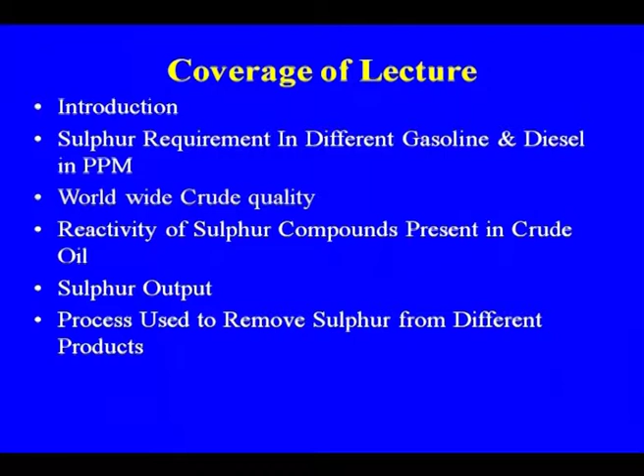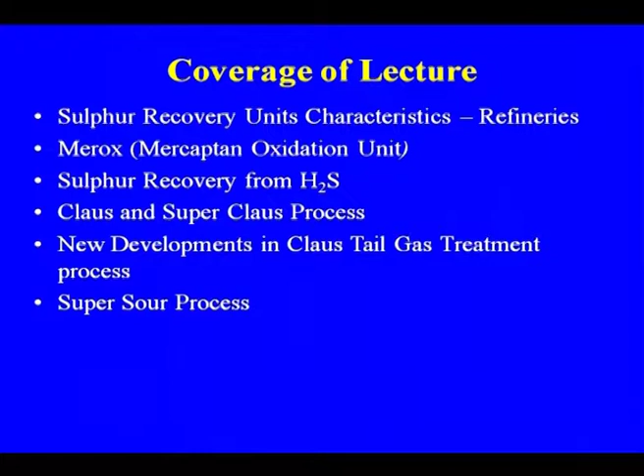Sulphur recovery units' characteristics, the Merox process, Merox sulphur recovery from H2S - there has been continuous development in sulphur recovery processes, because the conventional Claus process still had some emission of sulphur compounds, so how to minimize that emission. The super Claus process and other new developments have taken place, because the Claus tail gas was also containing sulphur, so how to treat that Claus tail gas - we will discuss the Claus tail gas treatment process.

Some other developments that have taken place include the Super Sour process, developed by Indian Oil Corporation, which is the indigenous technology that we have.

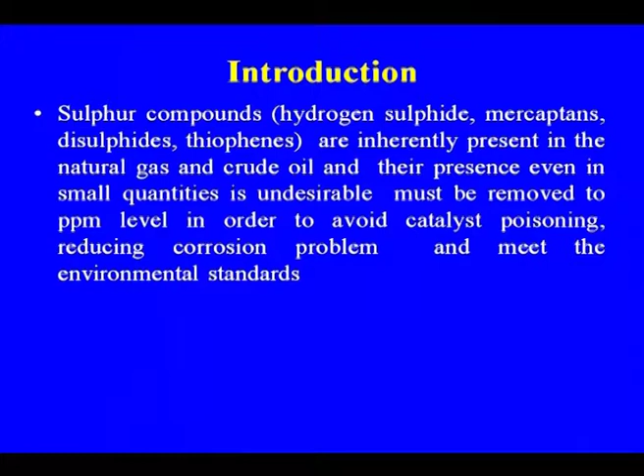Introduction about why we need this desulfurization process or sulphur recovery, and why it has become important. Sulphur compounds - hydrogen sulphide, mercaptan, disulphide, thiophenes - are inherently present in natural gas and crude oil, and their presence even in small quantity is undesirable, must be removed to ppm level in order to avoid catalyst poisoning, reduce corrosion problems, and meet environmental standards, because the corrosion problem is also one of the severe problems because of the coming of high TAN crude oil and high sulphur crude oil.

As I told you, the level of sulphur has been increasing. The level of sulphur in the past two decades has steadily increased due to the use of more and more heavier crude, and cheaper high sulphur crude, which has forced the refining industry to go for additional facilities like ultra desulfurization for gasoline and diesel to meet the requirement of stringent sulphur emission standards.

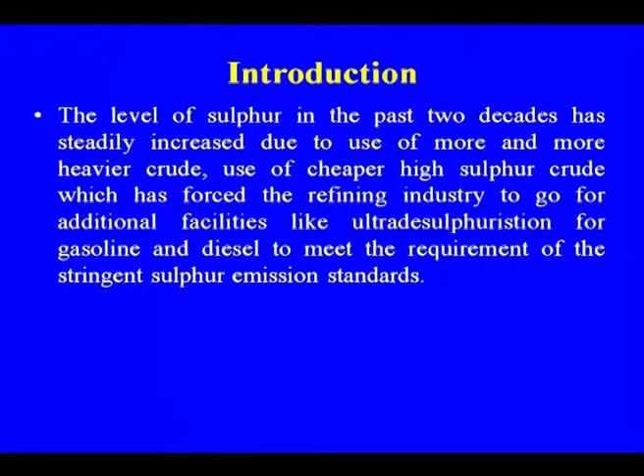Whatever products you are getting, whether diesel, kerosene, or gasoline, must be desulfurized before it goes for end use. So these are some of the driving forces which have led to the development of the various sulphur recovery processes or desulfurization processes.

Sulphur is one of the major impurities in heavy crude, resulting in higher concentration of sulphur compounds in the undesulfurized product stream. This product stream is not just the final product, but also the feedstock to various processes like FCC, hydrocracking, and catalytic reforming. As already discussed, before going to the main reactor, the feed is pre-treated, and even after that, the product contains traces of sulphur compounds.

To meet environmental standards of 50 ppm, the product has to be treated. Sulphur content in crude varies widely depending on origin, varying from one place to another, one well to another, and one region to another. So there is wide variation found in crude oil quality with respect to sulphur, and this variation is considerable, impacting the process scheme as well as the product slate.

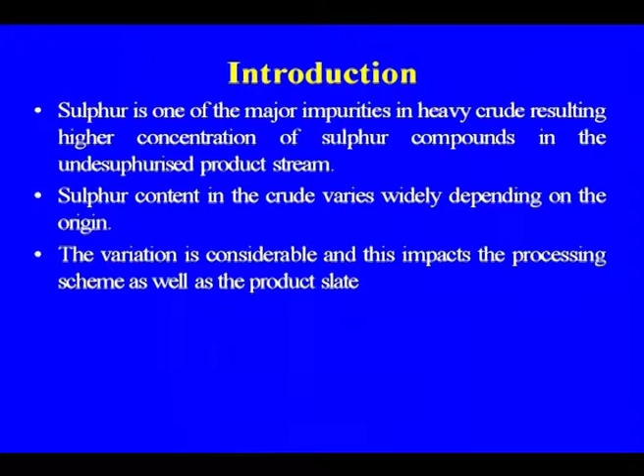Due to increasing environmental concern, stringent limits on sulphur levels in fuel are being implemented. There has been continuous reduction in SO2 emission as per Euro norms - Euro 1, Euro 2, Euro 3, and Euro 4 - and now to achieve 50 ppm is a big challenge for refineries through desulfurization. So ultra desulfurization, deep desulfurization, hydro desulfurization is required, which is an additional capital cost, an energy intensive step, and sometimes results in loss of hydrocarbon.

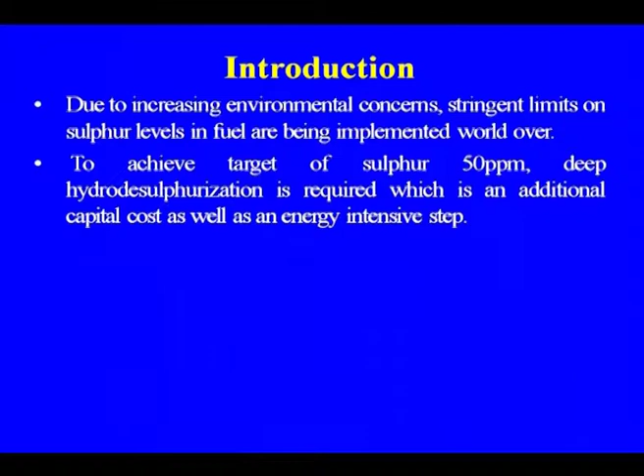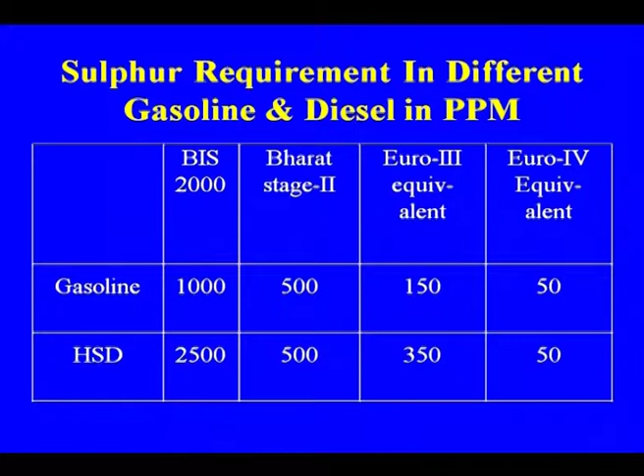This is why we are going for the desulfurization process. If you see these figures from 2000 to the changes taking place - the BIS standard was earlier 1000, Bharat 2 it was 500, Euro 2 and Euro 3 150, Euro 4 is 50. So that is the level of SO2 that has to be maintained in gasoline or diesel. There is a lot of change in the standards also.

So this is one of the reasons why we are going for recovery of sulphur, and at the same time sulphur is also a very important feedstock for various chemical plants. The only problem is that the generation of sulphur is not so huge as required, whether for sulphuric acid or other plants.

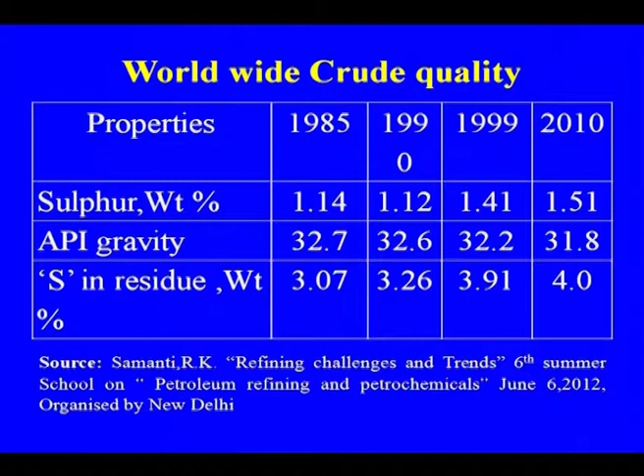This is the worldwide crude quality, how it is changing, and from 1985 to 2010, the sulphur content in crude oil varied from lighter to heavier sulphur in the residue, which is also increasing. So these are some of the problems which necessitate desulfurization of the product and desulfurization of the feedstock to various processes.

During this process, from the various streams we are getting sulphur, because one of the major sources of sulphur in the refinery is the FCC. If you see the FCC, the feedstock going to it is pre-treated. So one of the major sources of sulphur is the FCC.

This is the sulphur content of various crudes, indigenous and other crude. Here it is Bombay High 0.1, Bonny 0.1, Arab Heavy crude 2.87. So you can see the wide variation in sulphur content across crudes.

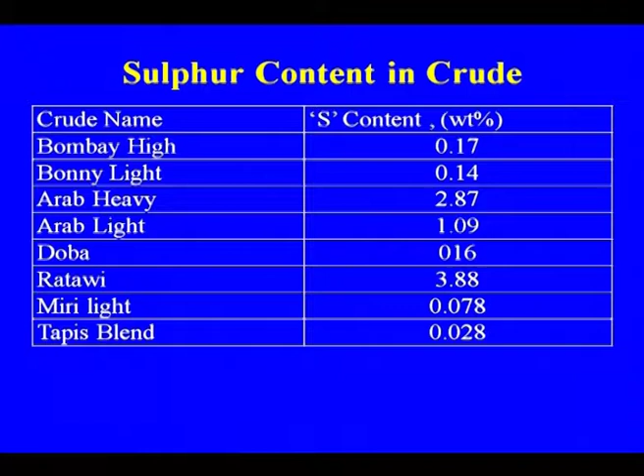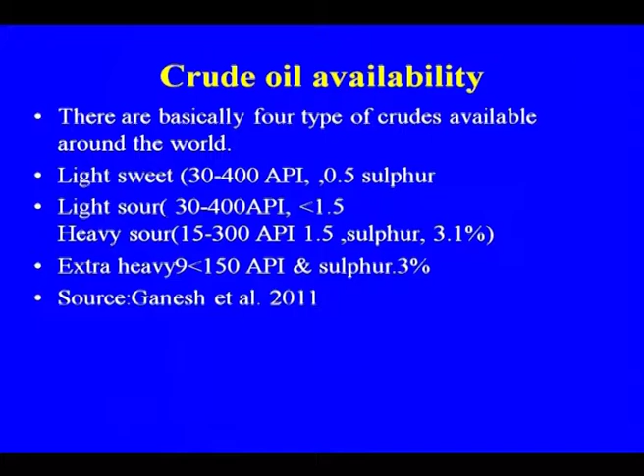There are basically 4 types of crudes available around the world, as already discussed - light sweet, light sour, heavy sour, and extra heavy sulphur. So this is how sulphur content varies, and API gravity also varies. In case of light it is 30 to 40, light sour is 30, but in case of heavy sour it is a much heavier feedstock.

This is how changes are taking place in crude oil availability in the future. It is expected that more and more heavier crude oil will be available, and you will have to adjust your processing scheme in the refinery accordingly to meet environmental standards, because now you will have to supply fuel of Euro 4 norms even in India. Some refineries are already ready to supply fuel of Euro 4 norm. So definitely these are some of the changes taking place in refinery processes because of the coming of heavier crude or high sulphur crude.

These are the reactivity of the sulphur compounds, relative reaction rate, boiling point of the various components, which creates a lot of problems. Depending upon that, the removal of mercaptan and dimethyl sulfide is easier than thiophene or benzothiophene.

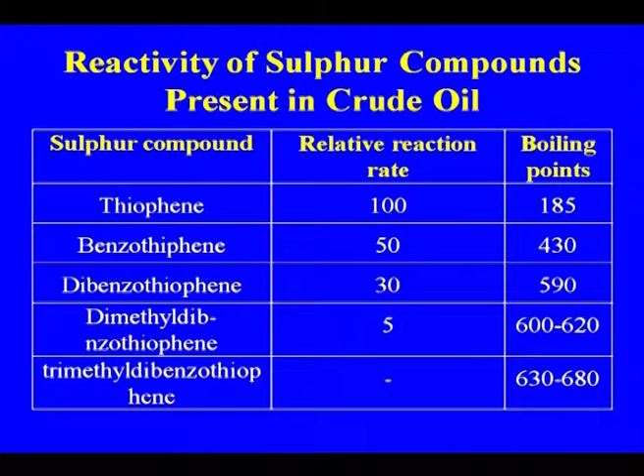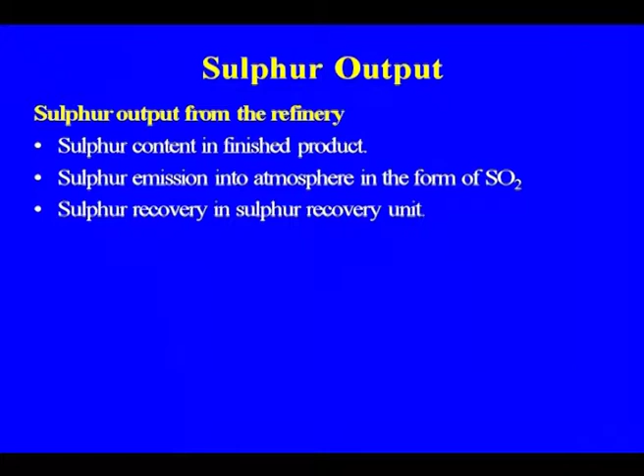Now let us discuss the sources from where sulphur is coming in the stream: sulphur contained in the finished product, sulphur emission into the atmosphere as SO2, and sulphur recovery in the sulphur recovery unit. Earlier, the Claus process or modified process achieved up to 97% recovery, so some sulphur compound still remains. Because of that, development continues in the sulphur recovery unit to achieve maximum removal of the sulphur compound.

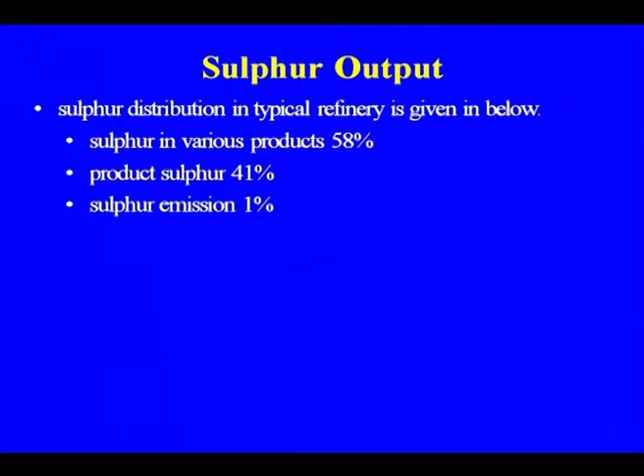Sulphur distribution in a typical refinery: sulphur in the various products 58%, product sulphur 41%, sulphur emission 1%. So you see the major contributors are the products from various refinery operations.

These are some of the sources which need removal of sulphur, and we do desulphurization for removing it. In the LPG treating unit we remove sulphur from the gases, which then go for further processing for removal from the gas stream, and finally go to recovery of sulphur by Claus, modified Claus, or other modifications.

In the gasoline hydrotreating unit, this is again the hydrodesulphurization process. Aviation turbine fuel uses the Merox process and hydrotreating. Diesel hydrotreating process also involves hydrodesulphurization, where sulphur lands up in the fuel gas as H2S during the hydrotreating process.

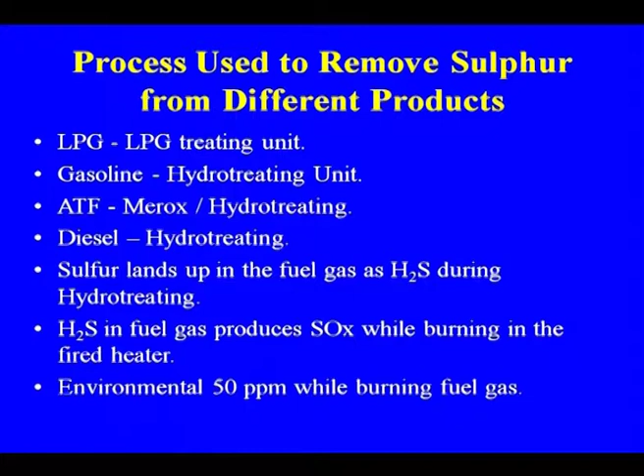H2S in the fuel gas produces SOx while burning in the fired heater. The environmental standard is 50 ppm while burning the fuel gas.

Hydrotreatment process: hydrotreatment of various streams from the refinery and petrochemical industry has become an integral part in order to meet feed standards of various processes, avoid catalyst poisoning, improve the quality of products, and meet environmental standards.

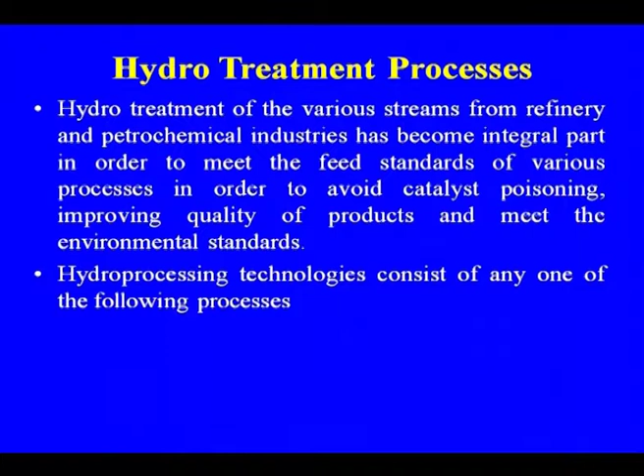Hydroprocessing technology consists of any one of various processes we use, which may be pre-treatment, hydrocracking processes, or hydrotreatment of fuels and lubricants. These are some of the hydrotreatment processes.

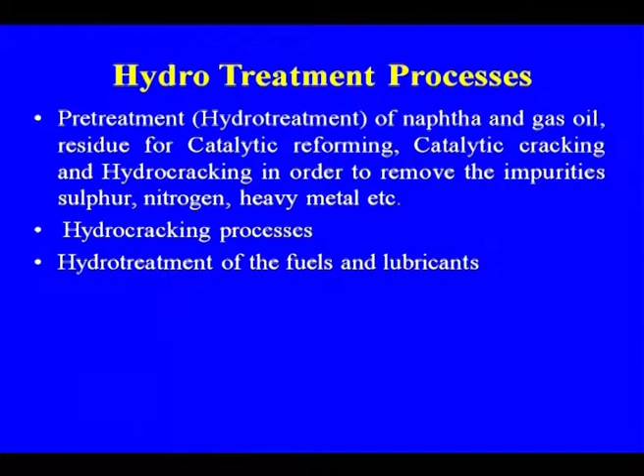Pre-treatment involves hydrotreatment of naphtha and gas oil, and residue for catalytic reforming, catalytic cracking, and hydrocracking, in order to remove impurities like sulphur, nitrogen, heavy metal, etc. There are also hydrocracking processes and hydrotreatment of fuels and lubricants.

This shows the major sources of sulphur and the recovery process in the refinery: the crude oil distillation unit, FCC or residue fluid catalytic cracking gases, LPG, hydrocracker, hydrotreating gases, coker, fine gases, and LPG.

These are some of the sources which normally go through amine absorption and then amine regeneration for the gases. After final removal, the gases go to sulphur recovery where we get sulphur. Even the tail gases go for further removal, and finally it goes to incineration.

Definitely another source in the refinery, because of processing sour crude, is the sour water from various streams. The gases from the sour water are removed by stripping, and then again it goes to the sulphur recovery plant.

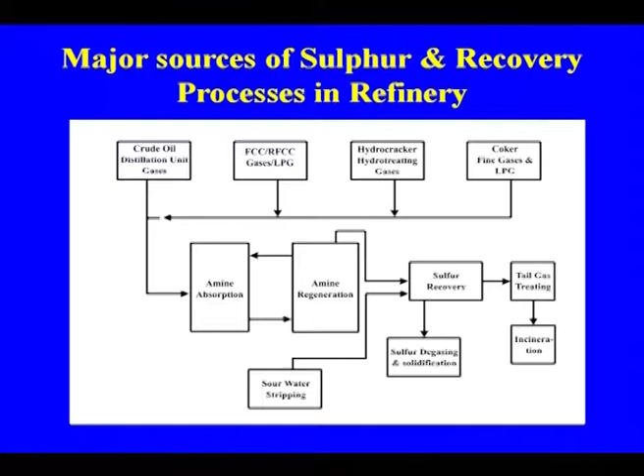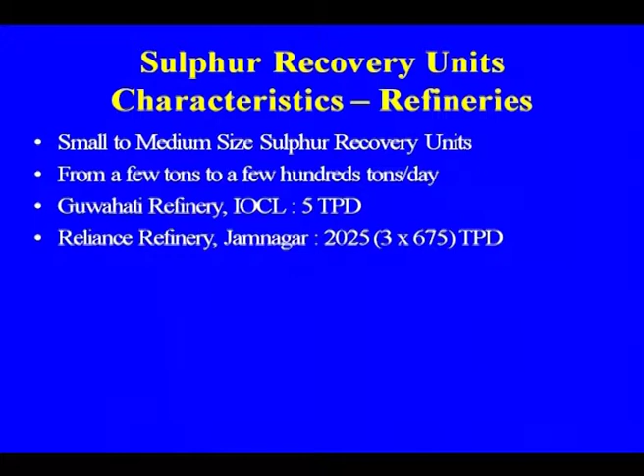This is actually the same process we discussed. Sulphur recovery unit characteristics: small to medium sized sulphur recovery units, from a few tons to a few hundred tons per day, Guwahati Refinery, because the sulphur content is low, so sulphur production is less. But in case of Reliance Jamnagar, where they process heavier feedstock, the production of sulphur is high.

Sulphur recovery units: feed composition varies linked to the refinery operating mode and crude feedstock. High flexibility is required, with multiple trains. Acid gas is always rich, with high H2S content. Ammonia from the sour water stripper is always present, sometimes in relatively high quantity.

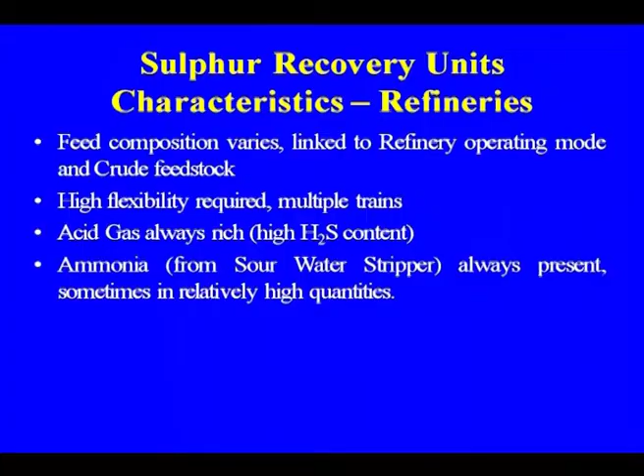This ammonia comes from the crude distillation column, or even from the FCC, to get rid of the corrosion problem. So these were some of the sources we discussed about where the sour gases or sulphur gases actually come from, and now let us discuss about the sulphur recovery unit.

The sulphur recovery unit consists of recovery of sulphur from H2S present in acid gas from the amine treating regeneration unit, and H2S from the sour water stripping section - there are two sources. One, all the gases going to the amine absorption, and after regeneration of the amine, the gas stream goes for treatment. The other source of sour gas H2S may be from the water stripper section, from the sour water.

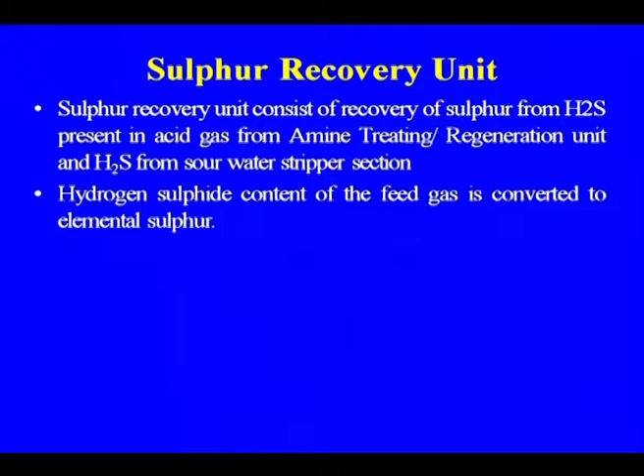Hydrogen sulphide content of the feed gas is converted to elemental sulphur, because this is how we can get rid of the sulphur compound. Amine absorption and regeneration is the process I told you about: first the absorption of H2S bearing stream, then regeneration of amine. The H2S rich stream from amine regeneration is sent to the sulphur recovery unit for recovery of sulphur from the gas.

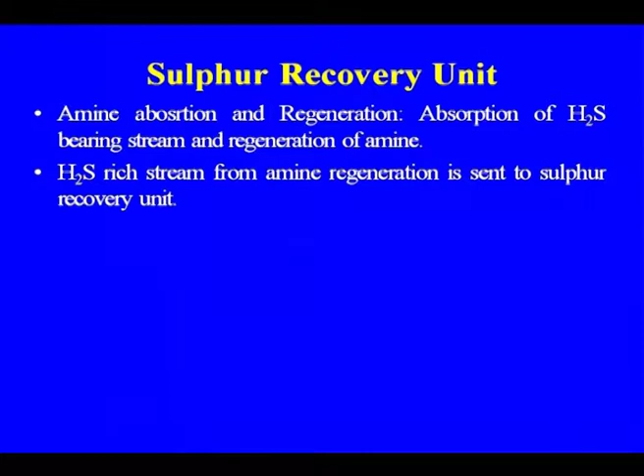Now let us discuss the Merox process, an integral part of the refinery - every refinery has a Merox process. The Merox process is used in the refinery for controlling mercaptan sulphur in gases, LPG, naphtha, and other petroleum fractions. The process is used for chemical treatment of LPG, gasoline, and distillate from the FCC or hydrocracker unit, whether once through or two stage, to remove the mercaptans.

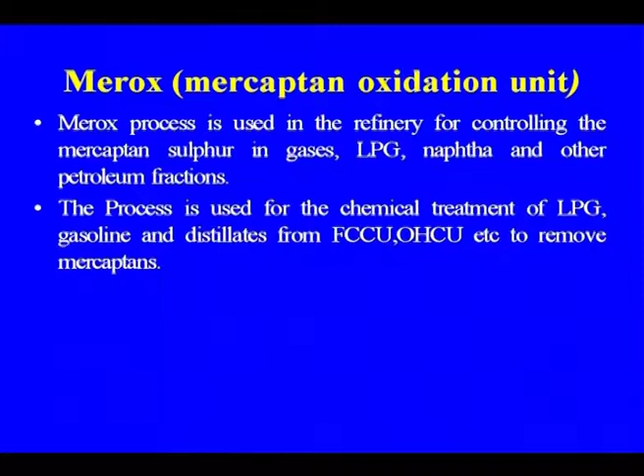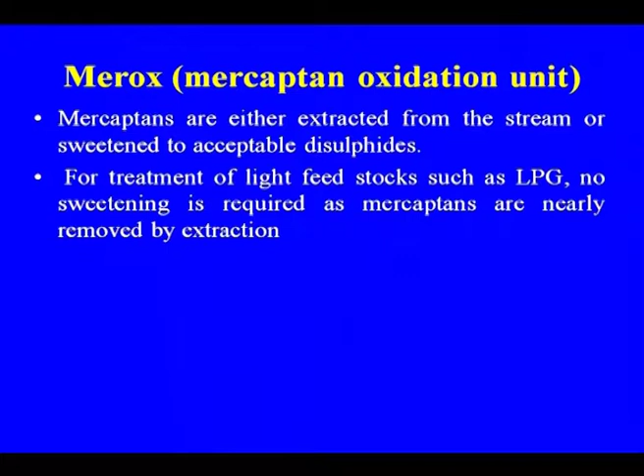Mercaptans are either extracted from the stream or sweetened to acceptable disulfide, since the disulfide smell is not present, but both mercaptans and disulfide have to be removed. For treatment of light feedstock such as LPG, no sweetening is required, as mercaptans are nearly removed by extraction. So these are the two types of methods, extraction and sweetening, to remove mercaptan from the gas stream.

However, feed containing higher molecular weight mercaptans may require a combination of Merox extraction and sweetening using a catalyst, because in the sweetening process we use a catalyst. The catalyst promotes the oxidation of mercaptans to disulfide using air as the source of oxygen.

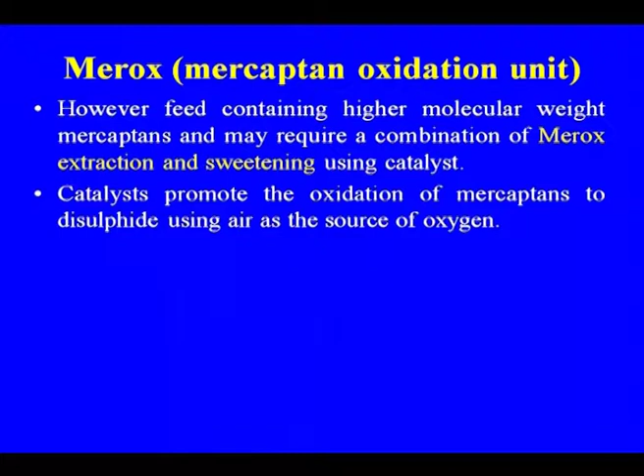Merox treatment can generally be used in the following ways: to improve lead susceptibility of light gasoline, though that problem is not there anymore since lead has been phased out; to improve the response of gasoline stock to oxidation inhibitors added to prevent gum formation during storage; and to improve odor in all the stock gases.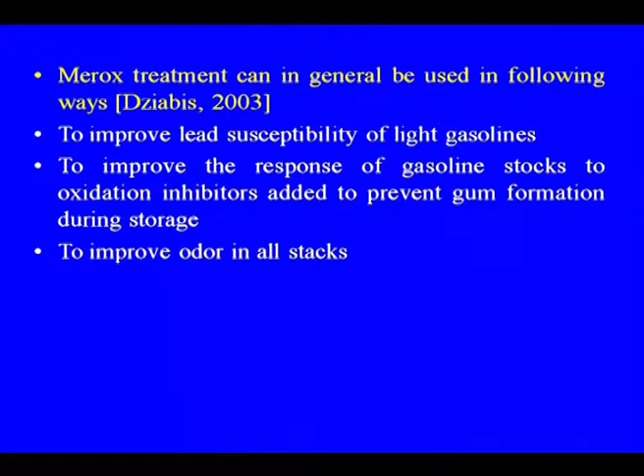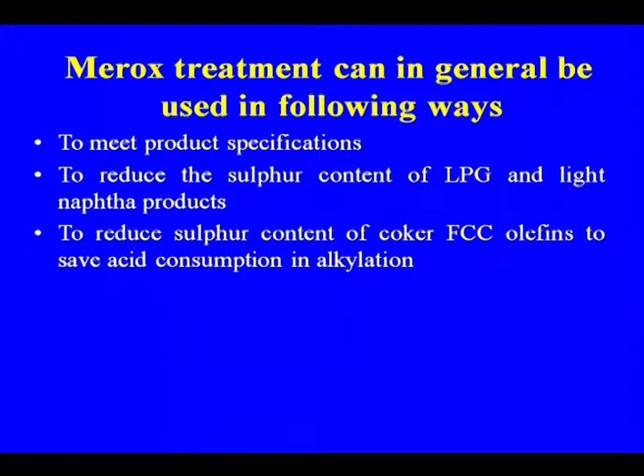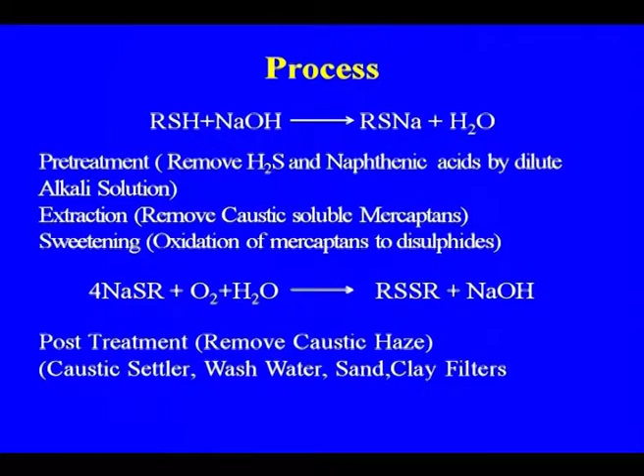Sulphur recovery from H2S: whatever H2S we get, the conversion of H2S or mercaptan to sulphur is very important.

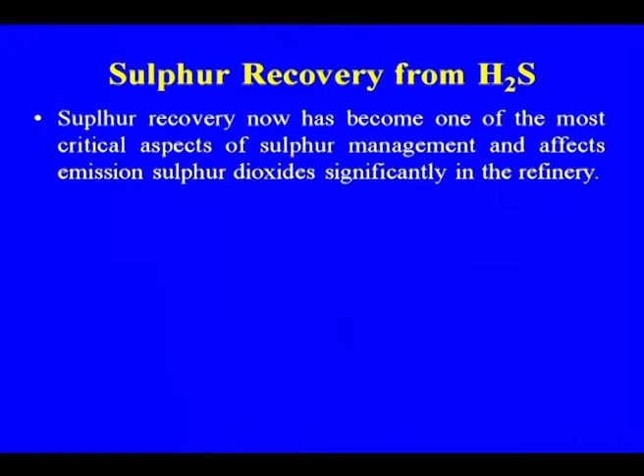Sulphur recovery has now become one of the most critical aspects of sulphur management and significantly affects sulphur dioxide emissions in the refinery, because if not properly removed, SO2 emission will occur. It's not only a requirement for the fuel, but also a requirement for refinery stack gas emissions to have lower sulphur dioxide. Their standards for emission of SO2 or particulate matter from the FCC, one of the main sources, are available in the standards given by the Central Pollution Control Board.

Now, let us discuss sulphur recovery in more detail. There are two sulphur recovery processes: the conventional Claus process used earlier, and the super Claus process. In the Claus process, removal of sulphur compounds was less and recovery was less, so the tail gases contained a lot of sulphur compounds. To minimize that emission, the conventional Claus process has been modified.

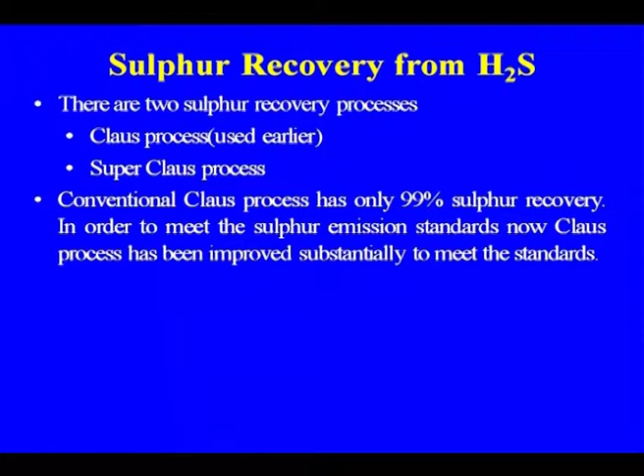The conventional Claus process has only 97 to 99% sulphur recovery. In order to meet the sulphur emission standards, the Claus process has been improved substantially. New processes are characterized by new catalysts, COS and carbon disulfide hydrolysis, increased recovery, and direct conversion of H2S to sulphur by oxidation, which is what we do in the super Claus process.

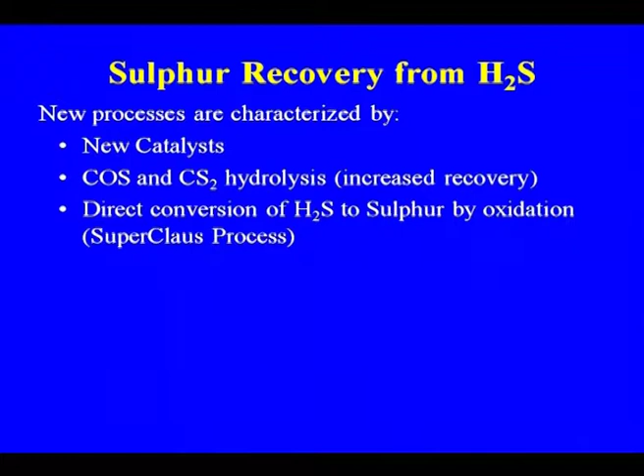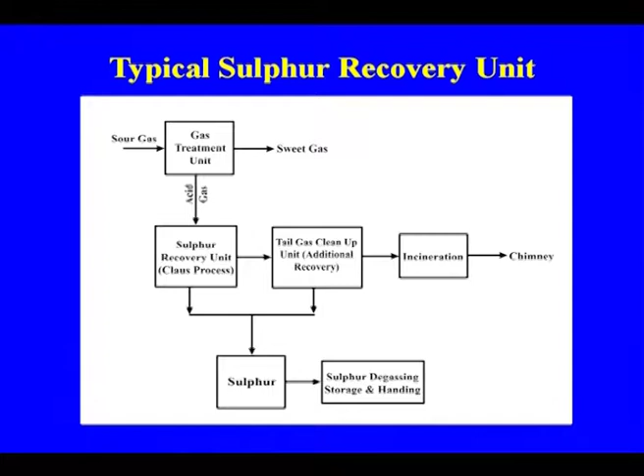This is the typical sulphur recovery unit. The sour gas goes to the gas treating unit, producing sweet gases, then acid gases go to the recovery unit, the Claus process. The tail gases from the Claus process go to further treatment: the tail gas cleanup unit for additional recovery. Finally you get sulphur, and the gases go up for incineration and then to the chimney. This additional modification came with stringent standards, so the sulphur recovery tail gas is treated, and finally the sulphur compounds can be used in various processes.

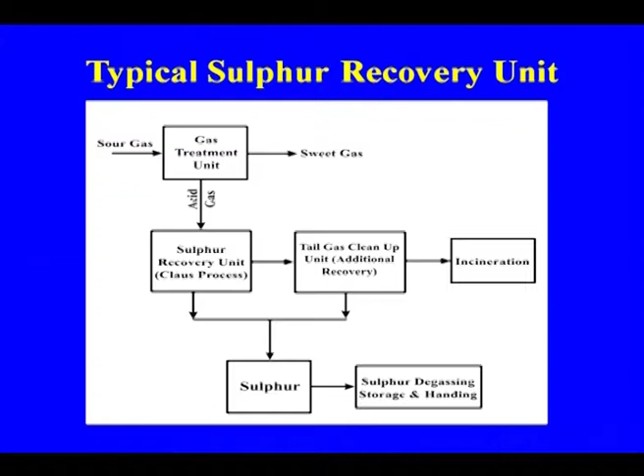Let us now discuss the Claus process in more detail. Claus process is a vapor phase oxidation process using alumina catalyst. In the Claus process, H2S is burned to form SO2, which reacts with H2S to form elemental sulphur. Sulphur is formed in vapor phase in the combustion chamber. The sulphur vapors are condensed and drained to the sulphur pit in the waste heat boiler, thus generating steam. In the Claus process, recovery is around 95 to 97%.

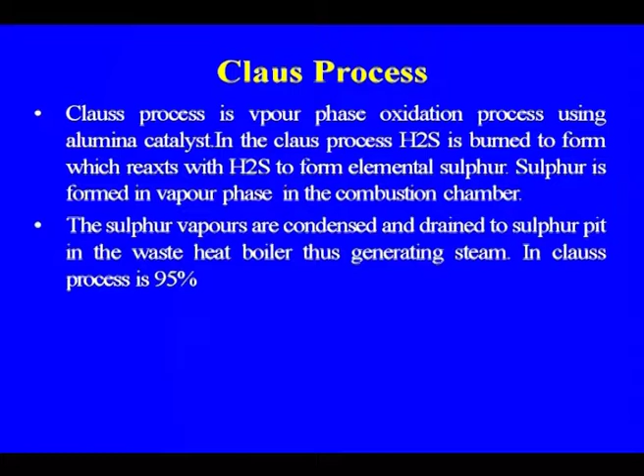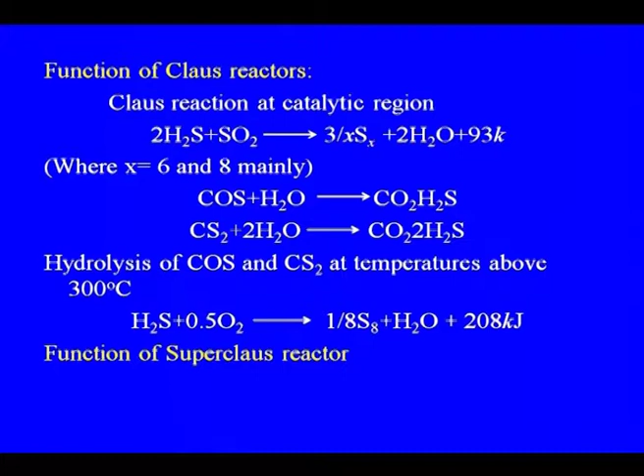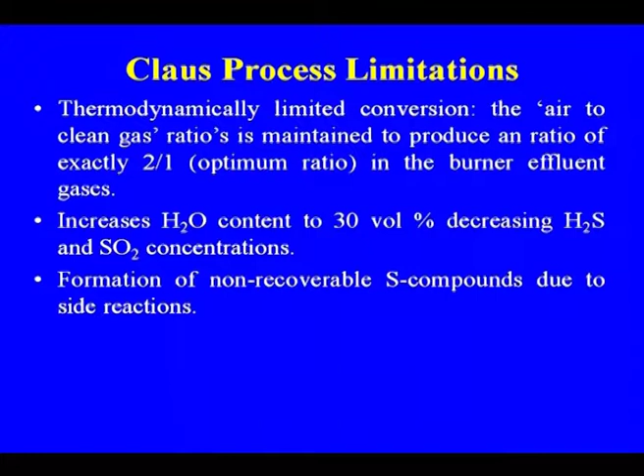Claus process limitations: thermodynamically limited conversion, the air to clean gas ratio is maintained to produce an exact 2:1 optimum ratio in the burner effluent gases. Increased H2O content to 30 volume percent decreases H2S and SO2 concentration, and there is formation of non-recoverable sulphur compounds due to side reactions. These are some of the limitations of the Claus process.

Let us now discuss the super Claus process. The problem with the Claus process was removal efficiency of around 95 to 96%, and further removal was necessitated, so removal of sulphur from the tail gases has been incorporated. The super Claus process was developed to catalytically recover elemental sulphur contained in Claus tail gas, to improve the overall sulphur recovery level in the refinery.

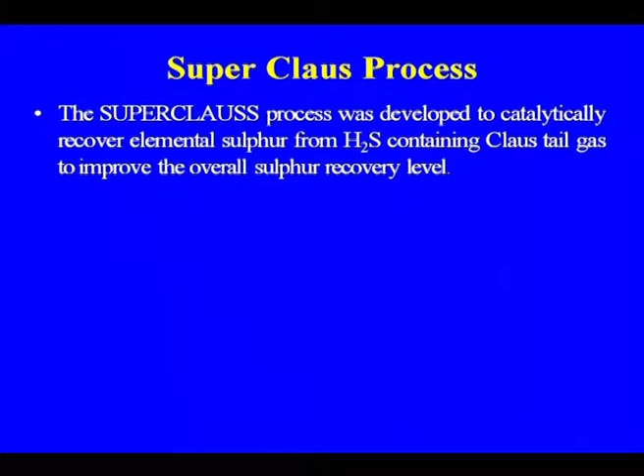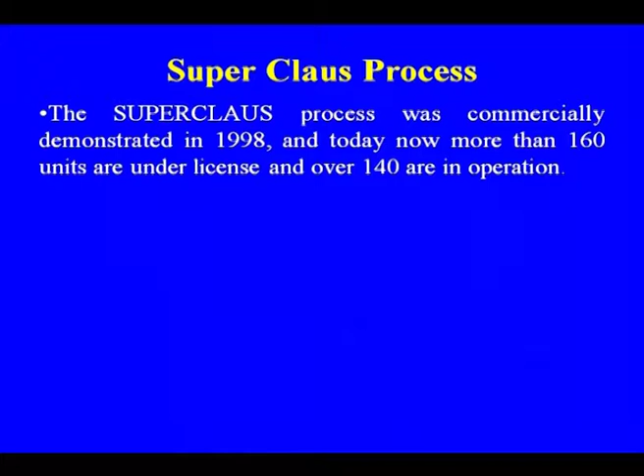The super Claus process was commercially demonstrated in 1998, and today more than 160 units are under license, with over 140 in operation. The super Claus process achieves high sulphur recovery levels by suppressing SO2 formation in the Claus stage and selectively oxidizing H2S in the presence of oxygen using a proprietary catalyst.

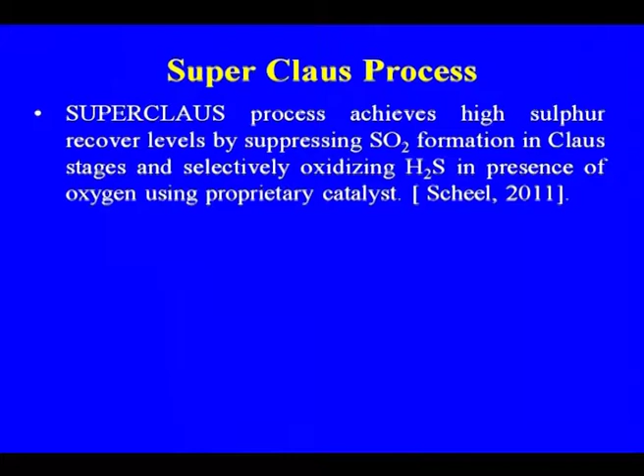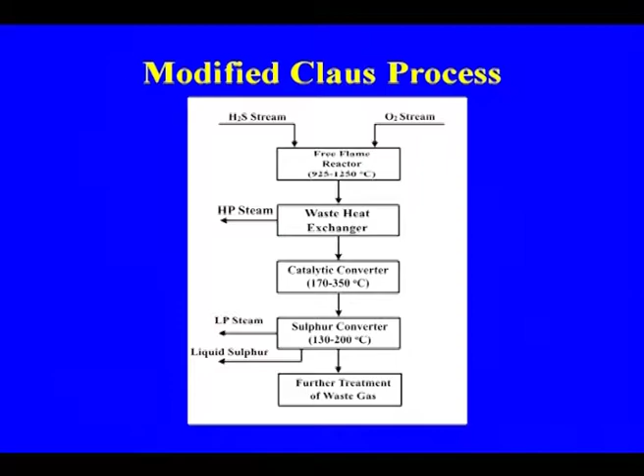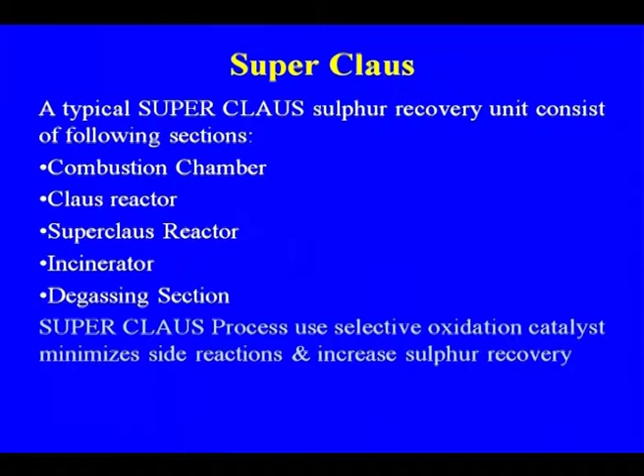So, what are the various units in case of the Super Claus process? Combustion, Claus reactor, Super Claus reactor, incinerator and degassing section. The Super Claus process uses selective oxidation catalyst, which minimizes side reactions and increases sulphur recovery.

New development in the Claus tail gas treatment process: in the conventional Claus and its modified version, the process achieves 90 to 97% conversion. Depending upon the efficiency of the Claus process, the conversion may be as low as 90%, meaning H2S and SO2 is burned, but the remaining H2S and SO2 remains in the tail gas. That was the problem in the case of the conventional Claus process.

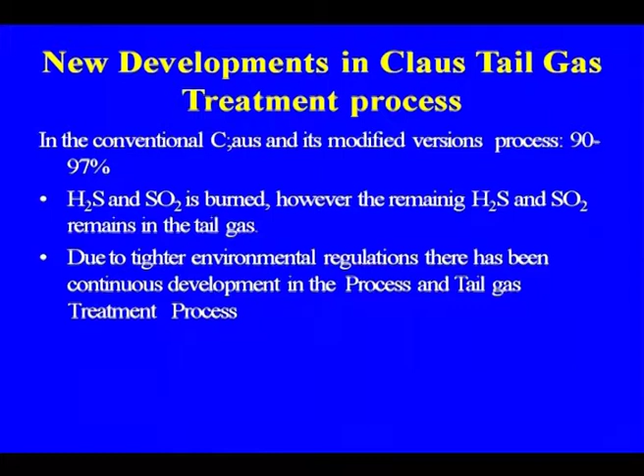Due to tighter environmental regulation, there has been continuous development in process and tail gas treatment processes. Some of the processes developed for treatment of the gases are: dry bed process, Lurgi Sulfreen process, Amoco cold bed absorption, direct oxidation of H2S, and liquid phase subdew point process, that is the Clauspol process.

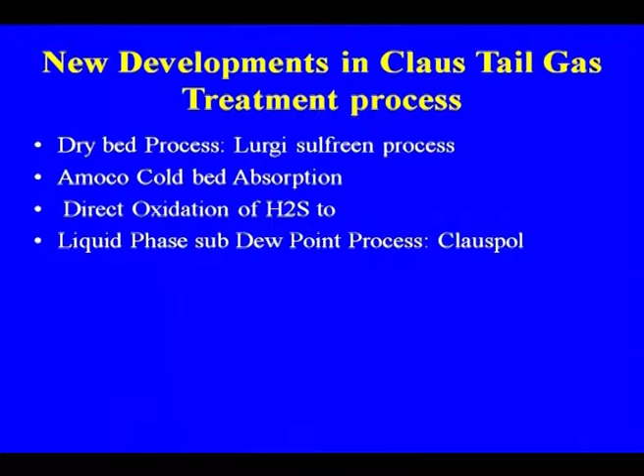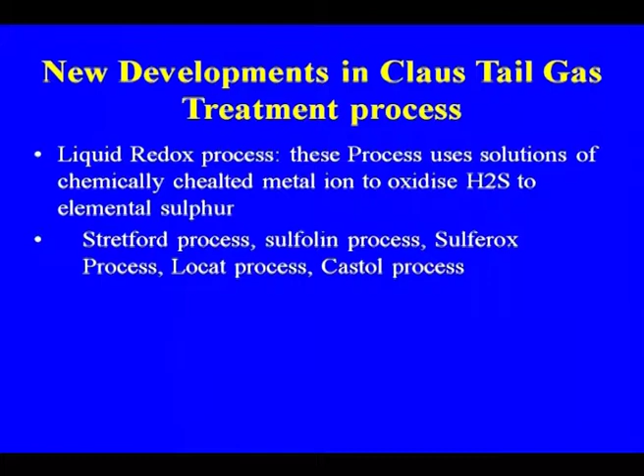Another process we are using is the liquid redox process. These processes use a solution of chemically chelated metal ion to oxidize H2S to elemental sulphur. Some commercial processes available are: Stretford process, Sulfolin process, Sulferox process, LO-CAT process, and Castol process, which are used to meet required environmental standards.

Another process was developed by Indian Oil Corporation's R&D center in India, called the Super sour process, which I will discuss. Merrichem technology has also been developed by IOC. There is also the biological desulfurization process, the bioabsorption process, and the Sulfa Zip process, developed by Gujarat Narmada Fertilizer Corporation in India, which they use for removal of sulphur compounds.

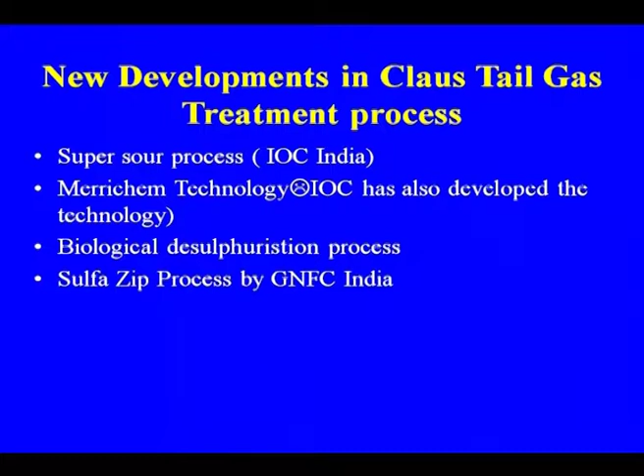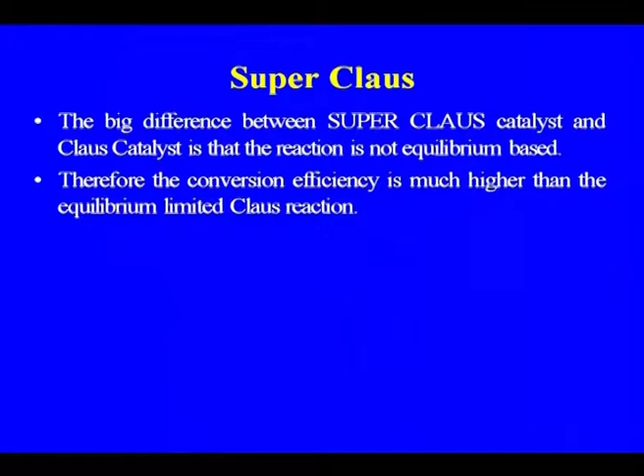In Super Claus, the big difference between the Super Claus catalyst and Claus catalyst is that the reaction is not equilibrium based. Therefore, the conversion efficiency is much higher than the equilibrium-limited Claus reaction. Another feature: Super Claus is a non-cyclic process that has repeatedly shown simplicity in operation, high online reliability, and sulphur guarantees up to 99.3%.

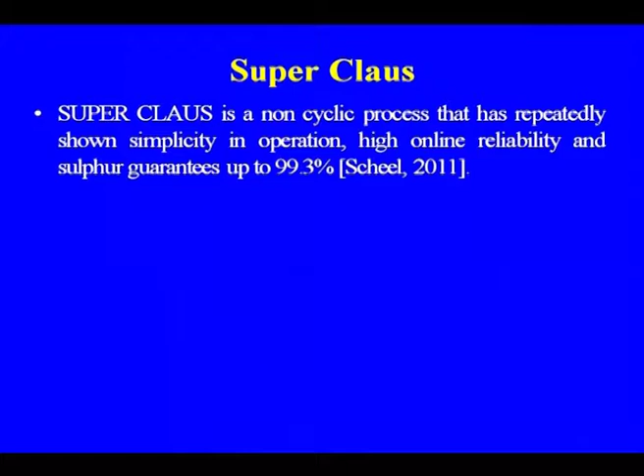Now let us discuss the Super Sour process developed by Indian Oil Corporation. Stringent environmental regulation has necessitated higher recovery of H2S from the sour water stripper unit. Sour water is also one of the major sources from the refinery, since we are treating high sulphur crude oil. During removal in various sections, sour water is generated and goes for stripping and treatment. The Super Sour process ensures minimum H2S loss, employing an additional hot feed flash drum upstream of the cold feed surge drum.

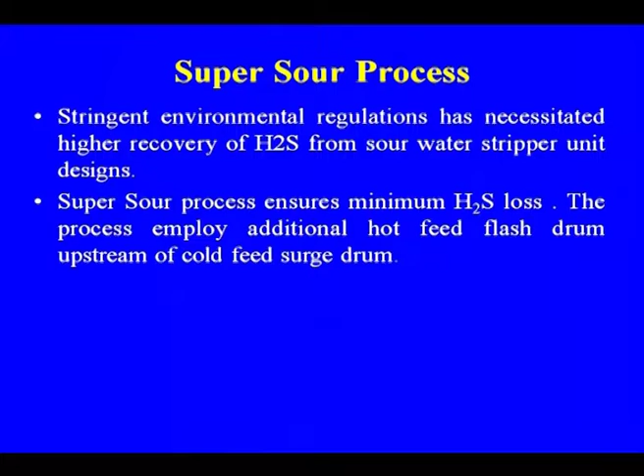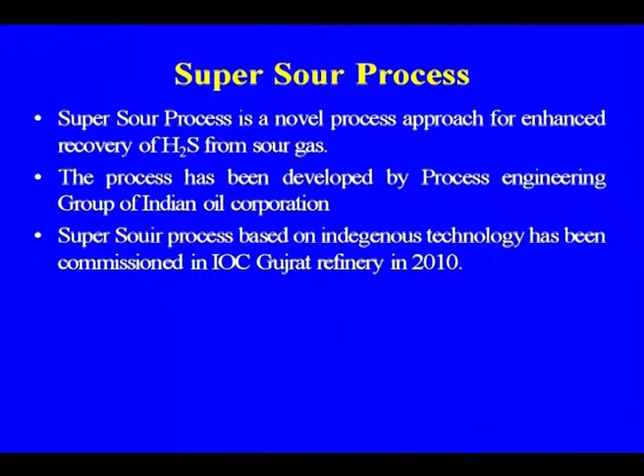The Super Sour process is a novel approach for enhanced recovery of H2S from sour gas, developed by the Process Engineering Group of Indian Oil Corporation. Based on indigenous technology, it has been commissioned at the IOC Gujarat Refinery in 2010, as there were a lot of problems in Gujarat Refinery with emission of sour gases and sulphur compounds from sour water, which this process addressed.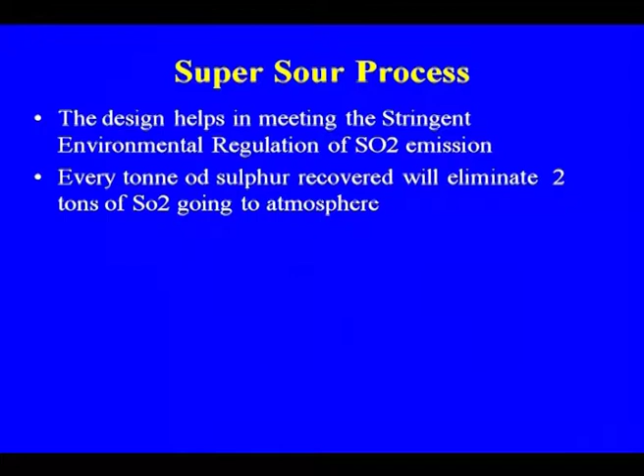The design helps in meeting stringent environmental regulation of SO2 emission. Every ton of sulphur recovered will eliminate 2 tons of SO2 going to the atmosphere. So, this is how the recovery part is very important.

This is actually the conventional process compared with the Super Sour process. In the conventional process, a flash drum removes hydrocarbon vapor and liquid from the sour water, with a feed tank and stripper. Here, some modification has been done compared to conventional stripping of sour water, and these are some of the units involved.

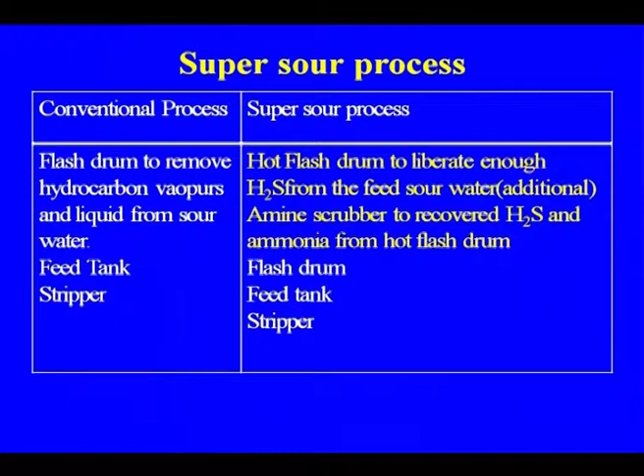If you compare this with your super sour process, there are some additional units that can be added, such as the hot flash drum to liberate enough H2S from this feed sour water, and an amine scrubber to recover H2S and ammonia from the hot flash drum, feed tank and stripper. These are also there in case of the conventional processes where we are stripping and treating the sour water. But in case of the super sour process, we have one hot flash drum that has been added, and an amine scrubber, so that the emission is reduced. This is the advantage and the difference between the conventional process and the super sour process.

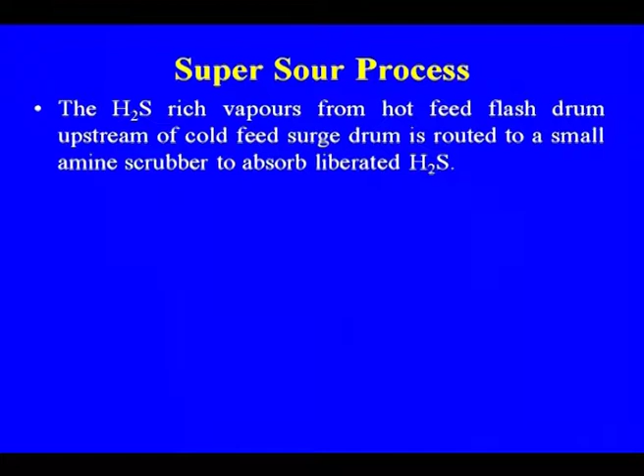In case of the super sour process, the H2S-rich vapors from the hot feed flash drum upstream of the cold feed surge drum are routed to a small amine scrubber to absorb the liberated H2S. So that is the additional unit in the super sour process, where amine is recovered from this part and sent to the amine scrubber, giving better removal efficiency.

The H2S-lean gas, containing primarily hydrocarbon, is then routed to the incinerator of the sulphur recovery unit. The absorbed H2S-rich amine is recovered in the amine regenerator and is fed to the sulphur unit for converting the sulphur to elemental sulphur. So this is the process that they are using for the sour water.

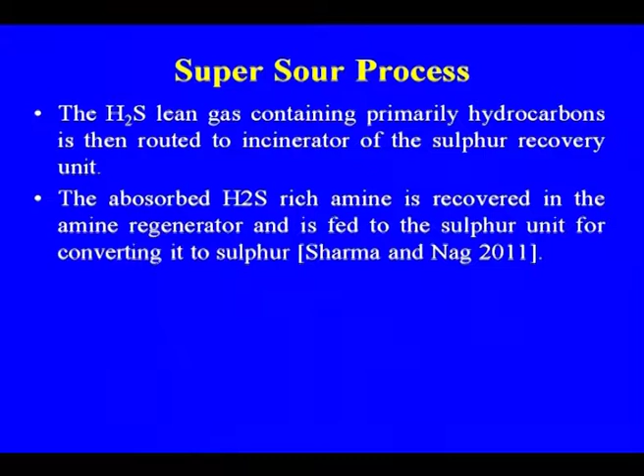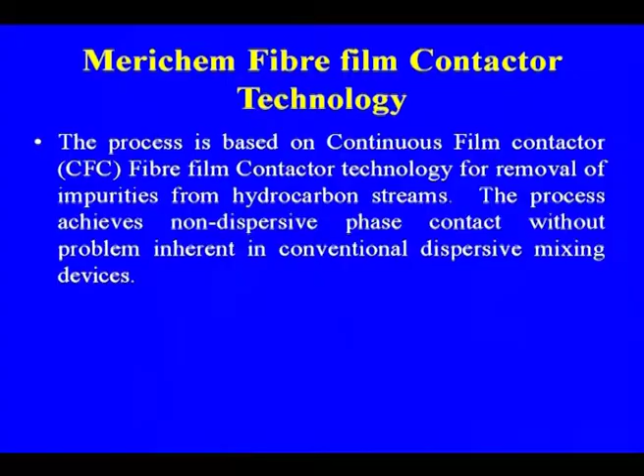So this was about the sulphur recovery and desulphurization process. As our standards are becoming more and more stringent, the desulphurization process and the sulphur recovery section of the refinery will definitely play a very important role. With Euro 4 we have 50 ppm SO2, and we do not know what will happen in Euro 4, Euro 5 and Euro 6 in the future. At the same time, the amount of sulphur produced in the refinery will increase with the utilization of more crude oil from various sources.

As I discussed earlier, many refineries are now going for heavier crude, because it is cheaper than sweet crude. So the crude oil being processed in the refinery is not from a single stream, but a blend, since about 65% of our requirement has to be met through imported crude. So the whole economy of the process depends upon the type of crude being processed, and these processes of sulphur recovery and desulphurization, where we are removing sulphur, will play a part.